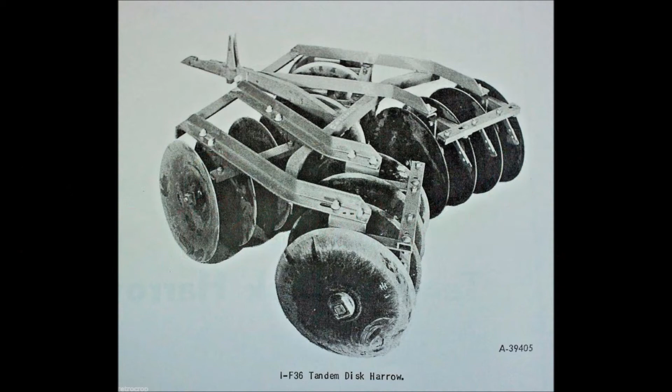This is Farmall 51 here. Doing an update video on my McCormick 136 or F36 disc harrow.

And yeah, I've got a mess here. This is a Farmall 130 doing for a friend of mine, rebuilding the front end here. I just got some of the front end parts, steering parts up here. Got to get that done.

The disc, I got the front gangs on, I got everything done. The older bolts had a bigger head on them, and the holes that are there are kind of large. So what I did, I had to put washers on that just so they wouldn't feel like they were pulling halfway in.

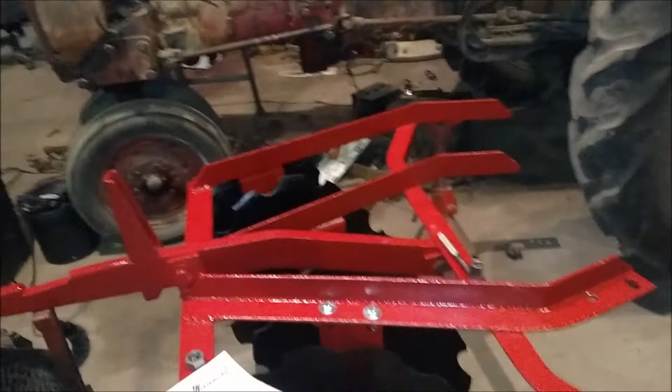But let's see, the axles are a little long. They're about an inch longer, so what I had to do was got a spacer in there. Like I say, I got the tab there. I got to fold that over.

But like I say, it's not going to be a really nice show piece. But I'm going to fix it up nice, and I'm going to carry it to the BNC Festival, the 19th, 20th, and 21st of May. And then I'm going to take it. I may end up selling it, or I may end up keeping it.

I don't know, I'd really like to have a 122 McCormick or International 122 disc. This disc here is along the era of the 130 tractors, the 100 130s. So I do not have the scrapers for it.

Although I may, between now and the May show, get them put on. I've got some angle iron, channel iron that is supposed to run along the back and behind the first gang there. All I'm missing is I got to find the brackets that fit in those two holes there. And what they would do, they would come out this way, and then your channel iron would sit right here.

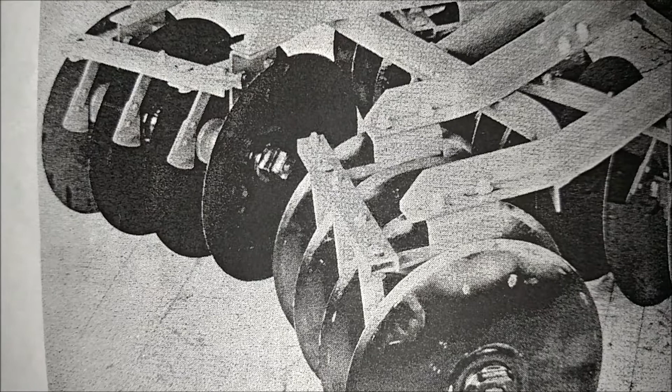Okay, it's kind of a bad picture there, but you see how they would fit there, and they run along the back, which I can get the scrapers. There's aftermarket scrapers that will work for it.

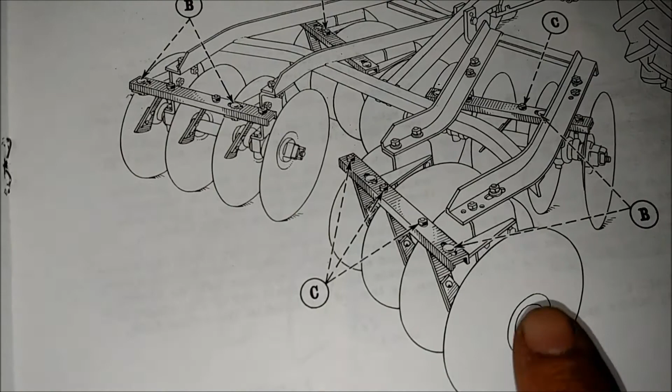That may be a better picture, but you can see there. Well, let's see, right along here you can see the scrapers, I mean the brackets that hold the scrapers. Let's see, that's just a simple piece of channel iron, and those scrapers there, I've got one there, and I believe that one will work.

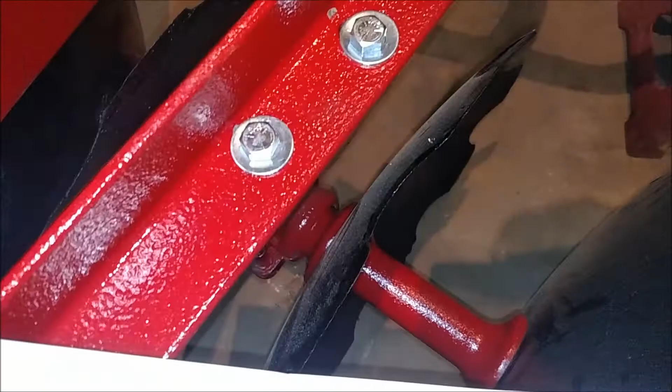Phone will focus here. Which I've gone through, and I've got all of it figured out, that there's two different sides of those brackets there. There's two different ways they go, because we had them on and one side wouldn't fit and the other side did. But anyway, we figured that out.

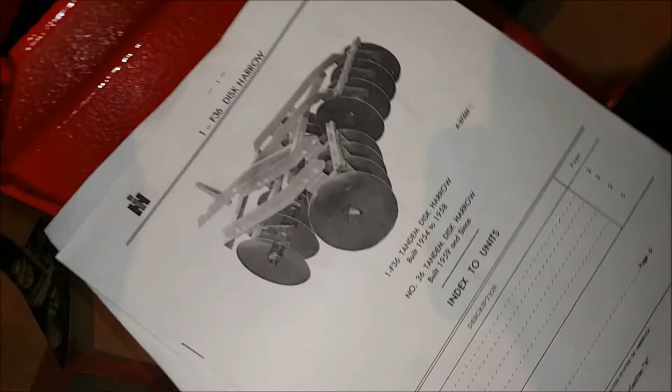Let's see. But see, that's it. See, that it's along 1954, '58. Right there toward when the 140 started, and I believe they started back with the 122 disc for the 140s, but I'd still like to have one that would fit, that would be closer to the era of the 140 that I've got.

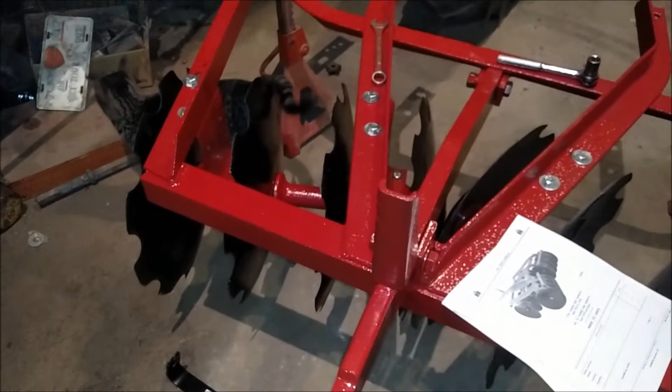welded. Like I said, a new back piece has been put in and welded in, and it's strong and good and firm back here. So everything's been cleaned up. All the bearings have been cleaned up and reworked. I've just got to pack them full of, I got some heavy-duty bearing grease that I'm going to put in my gun there. I'm going to pump them full. And other than that, that's pretty much it.

But it's starting to take shape. It's been a while, I think 3 years since I've had this thing. It come home in pieces. So, but